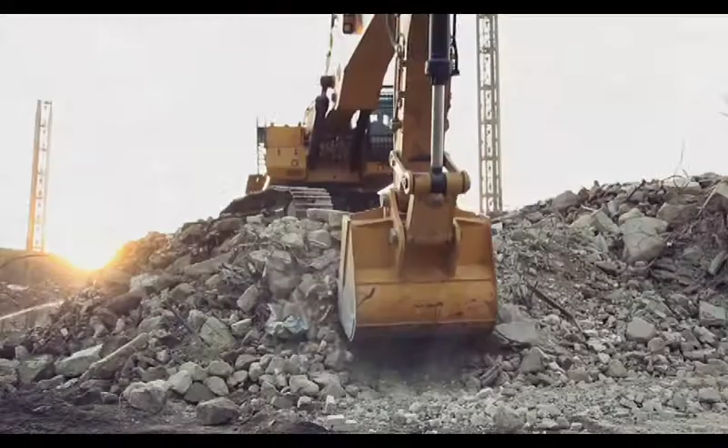The story of Alcar is one which has deep roots ingrained in the best of Italy, that which invents and innovates. Alcar is the result of the fusion between CTM, Costruzioni Termomeccaniche Meridionali, with Alcar S.p.A. of Valle in 2005. Two companies who have always associated their name with mechanics and light, medium and heavy mechanical and metalwork fabrication.

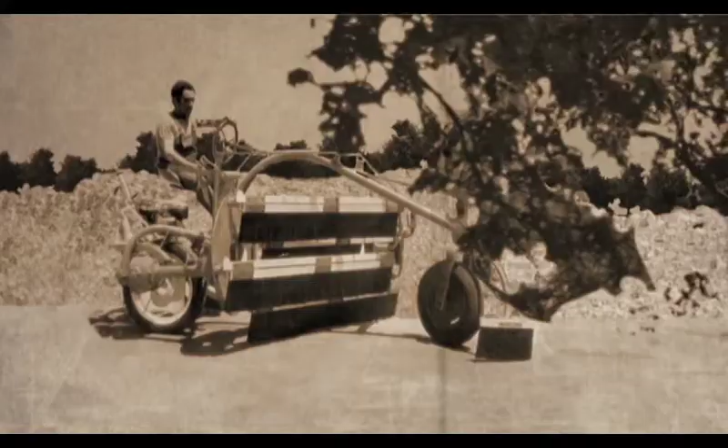CTM has manufactured conveyor belts, cranes and special machines for processing tobacco and the collection of olives in Puglia since 1960, over time becoming one of the main suppliers of Fiat Allis, today's CNH. Alcar S.p.A. belonged to the Bruneri family, a family which eternally linked its name with the world of earth-moving machinery. It was the Bruneri brothers who invented the first fully hydraulic excavator in the world in 1948.

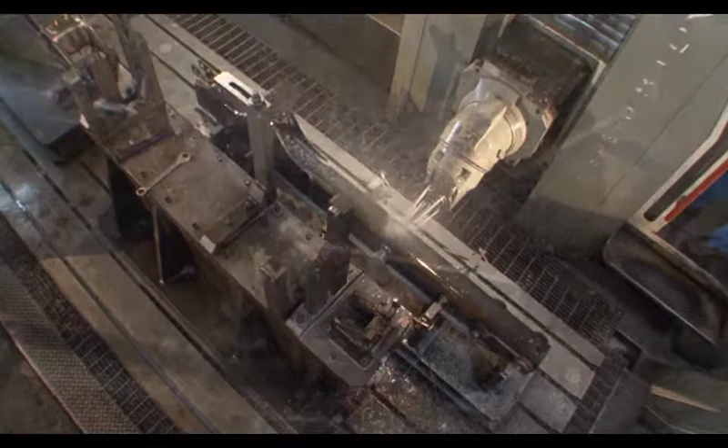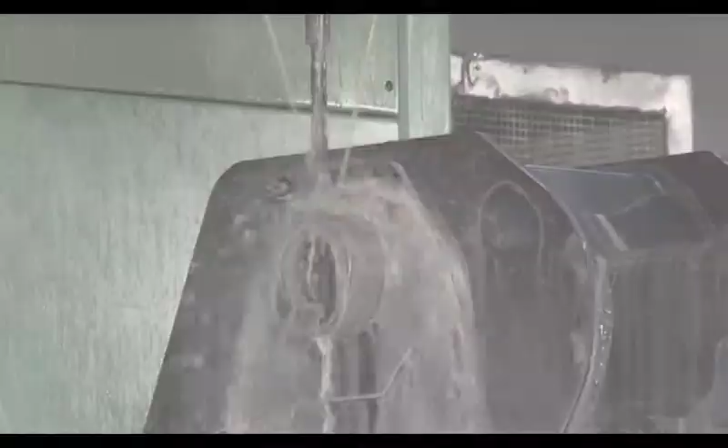Today, Alcar has become one of the European leaders in mechanical and metalwork fabrication for construction site machines. This is the only company in Europe which has a complete internal production cycle. In this manner, any component can be designed and realized independently for our clients. But let us proceed in order.

Today, Alcar has two plants, one in Valle, in the province of Turin, which manufactures the light mechanical and metalwork fabrication, and one in Lecce, which is for medium to heavy mechanical and metalwork fabrication. The internal management of all of the productive processes, together with the ability to design each component and each processing cycle, has created a virtuous circle.

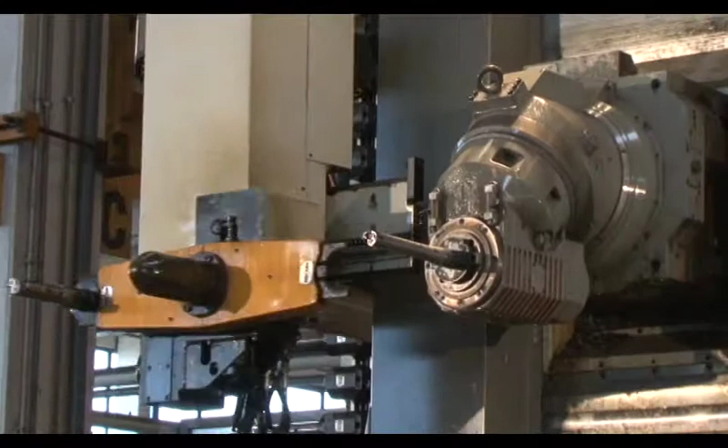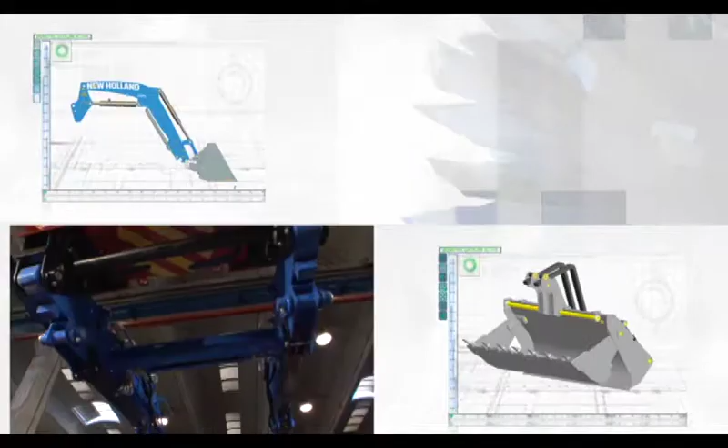On this path of continuous improvement, the increasing expectations of the clients, who are leaders in their own sectors, meet a continued and positive response. Today, Alcar counts CNH, Fiat Group, Caterpillar, Liebherr, Ålö, Turk Tractor and Sampierana amongst its clients.

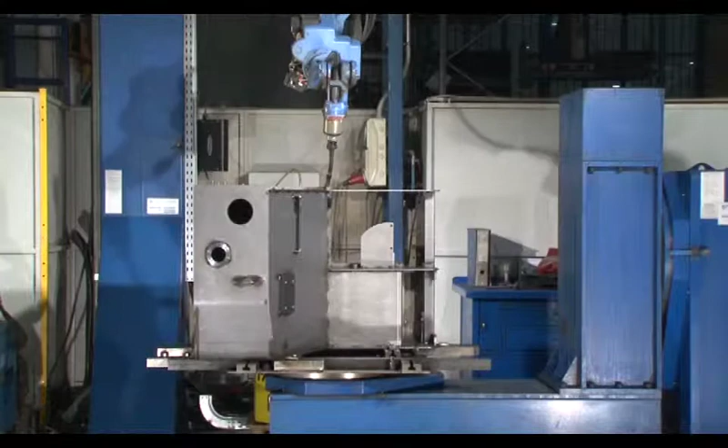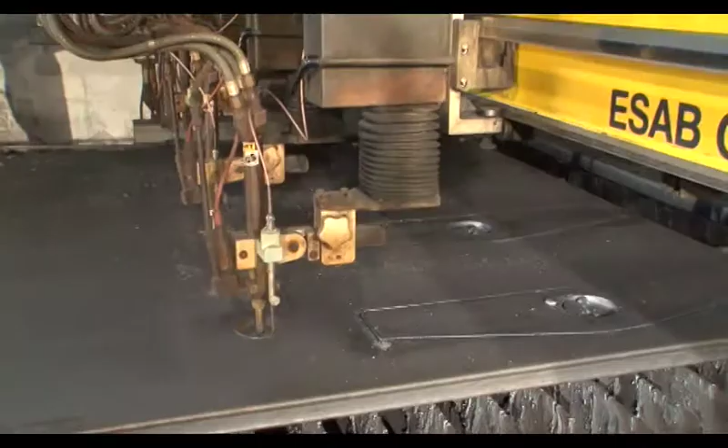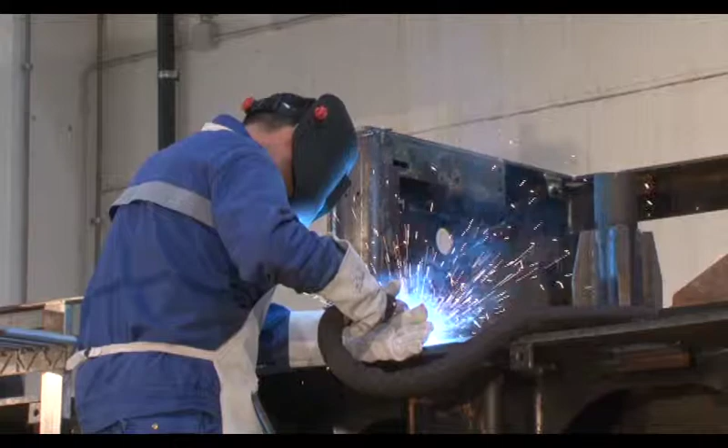In today's markets, which are always challenging and dynamic, Alcar has demonstrated that it knows how to start and above all modulate new productions thanks to a continued interaction between its design department and that of its clients, creating co-design and co-engineering activities. It often occurs during the research and development activity that Alcar not only flanks but substitutes its client, releasing them from burdensome and complex activities.

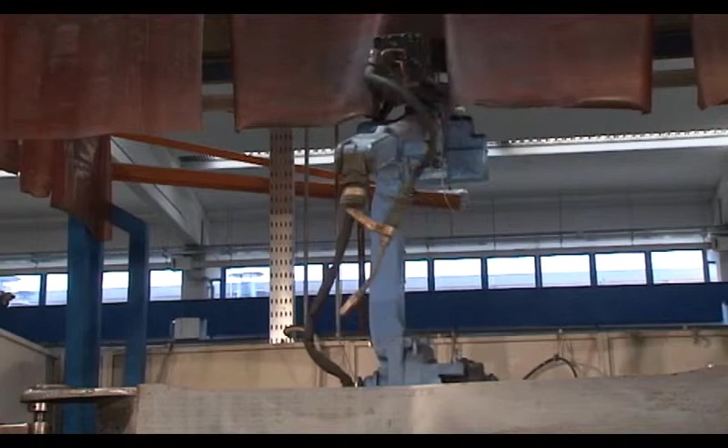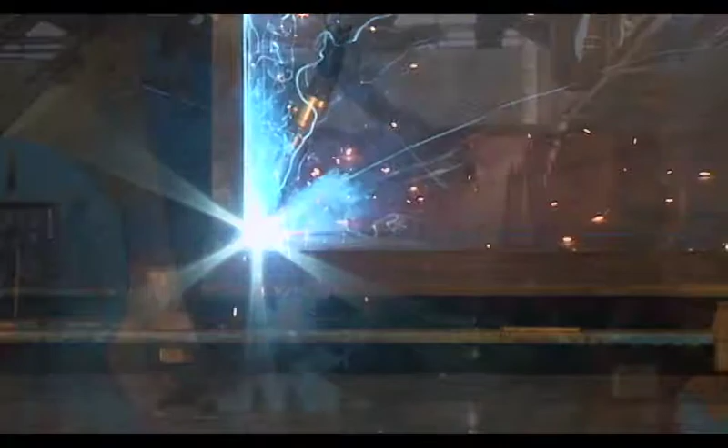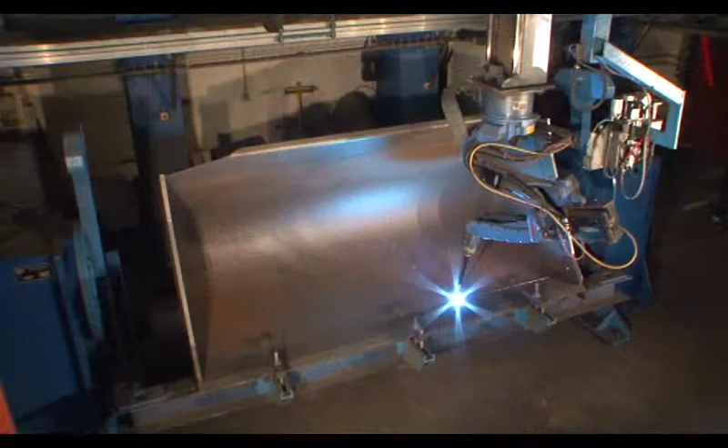The possibility of internally managing each work cycle allows the production times and costs to be positively influenced, simultaneously increasing the level of quality of the finished product. The Six Sigma methodology is constantly applied in Alcar and guarantees excellence in service from the point of view of continued optimization.

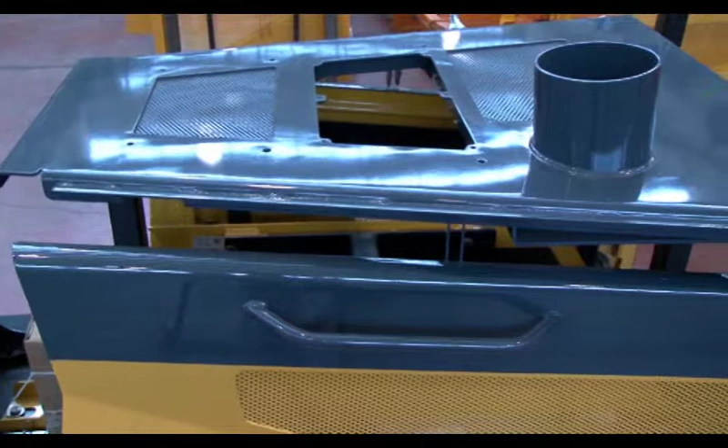The core business of the company is supplying clients with the finished component, painted, ready for assembly on their lines. The level of enrichment and the component service connected to the products which exit the Alcar plants on a daily basis have reached heights which were at one time unthinkable. The technology present in both plants is mutually integrated.

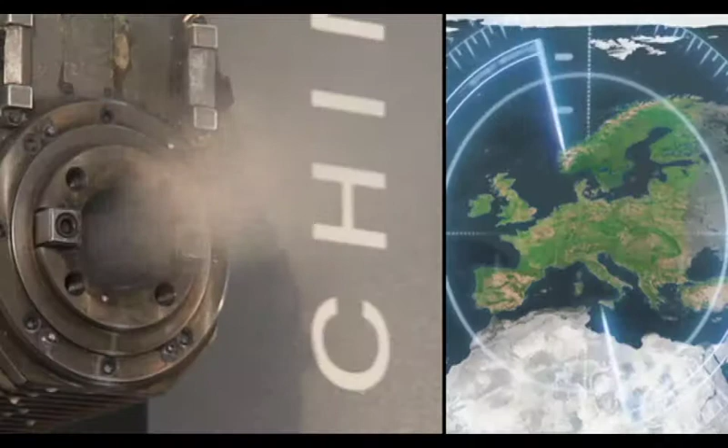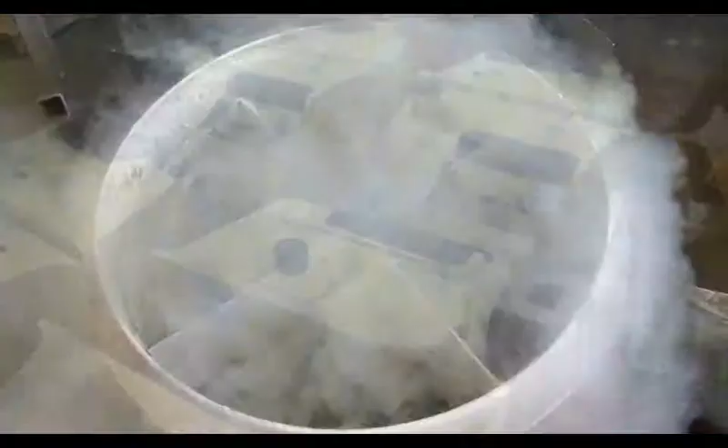Today, Alcar is the only European company able to supply mechanical and metalwork fabrication components which range from the structural to the mechanical and metalwork fabrication bodywork and tanks. Let us look at all of the productive processes in detail. Defined as the production cycle, the process starts with the preparatory phases of the raw material.

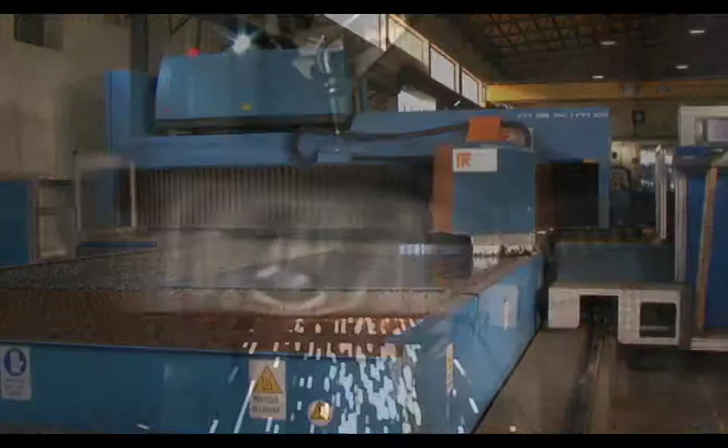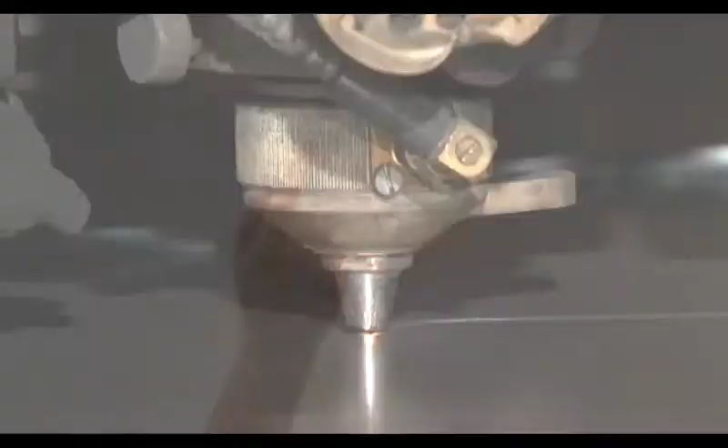This is followed by the cutting of the plates, which, depending on the thickness and the characteristics of the product requested, is carried out using different types of technology: 2D and 3D laser, flame cutting, plasma. This is followed by bending phases, which may be robotized, and the stamping phase carried out with presses which reach 800 tons. The component is welded manually as well as with modern robots.

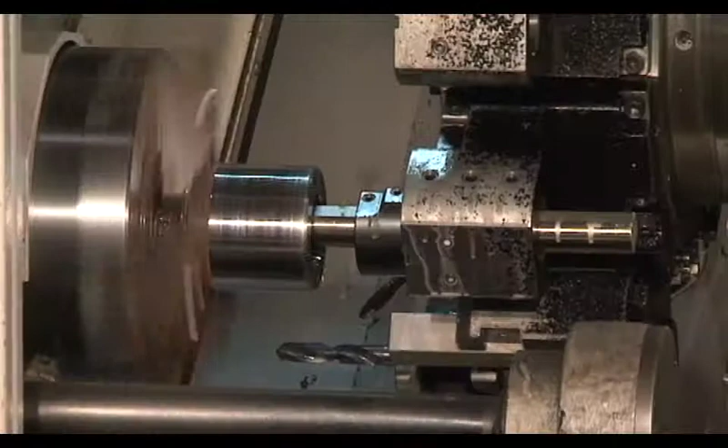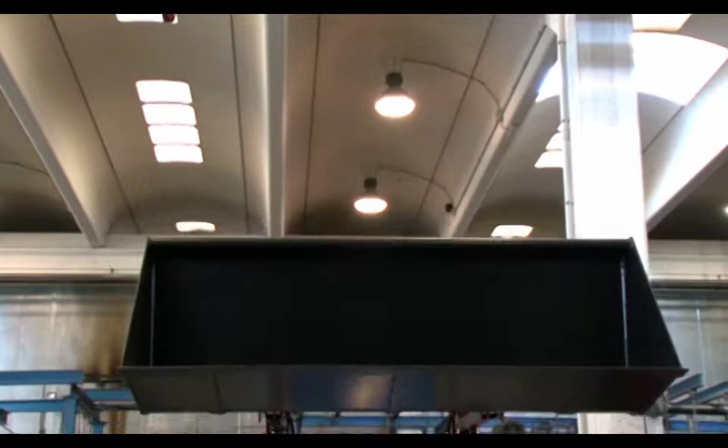The client is supported and assisted during the most delicate part of the design phase, such as the realization and the engineering of new products, or the improvement of existing products, in order to optimize both the service and aesthetic level of the product, as well as its cost. The project passes through the FEM structural analysis, the dynamic multi-body or fluid dynamic systems, to arrive at the 3D modeling which are specified in the realization of the executive table.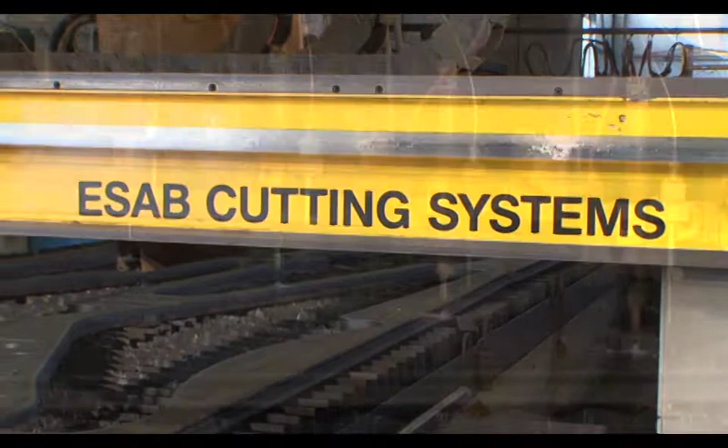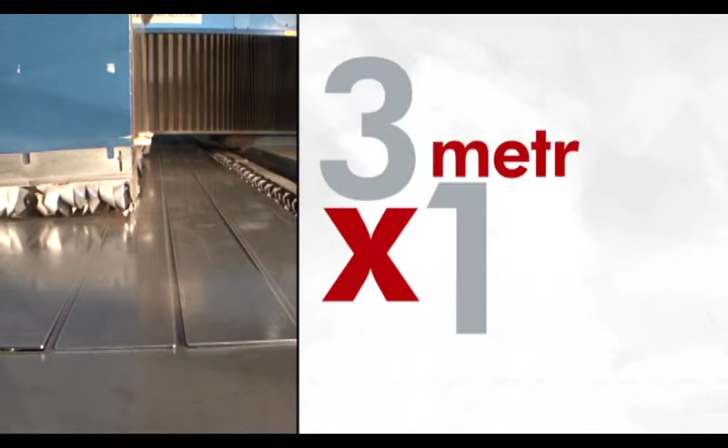Beyond the laser technology, the company also has flame cutting and plasma systems in order to optimize each individual productive request. The laser cutting system is employed for thicknesses up to 25 millimeters, with bench lengths of 3 meters by 1.5 up to 16 meters by 4.

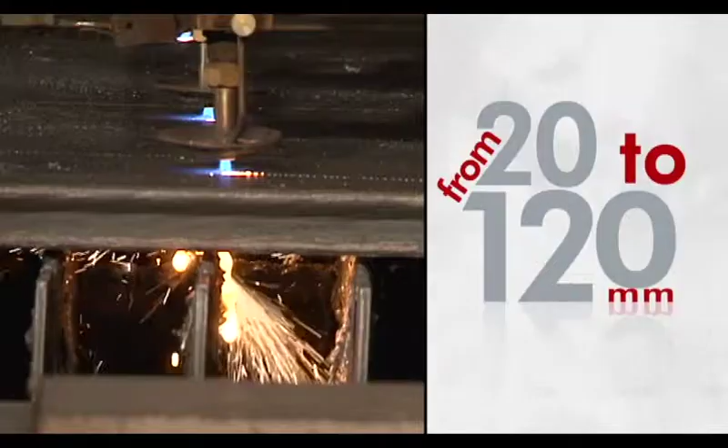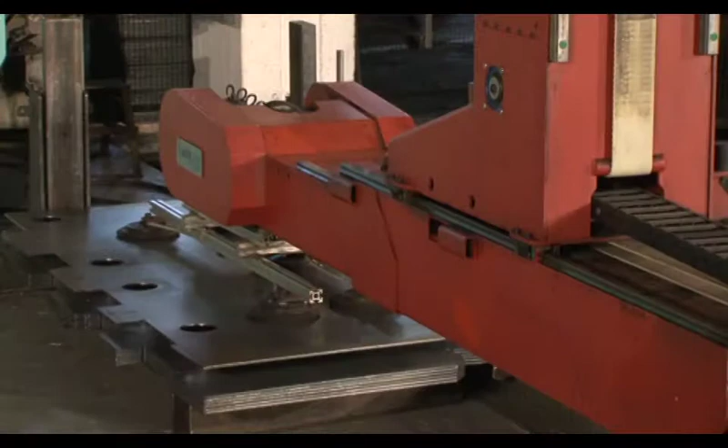The thermal cutting system is employed for thicknesses of 20 to 120 millimeters for a maximum size of 3 meters by 12. The presence of a plasma torch, which works in combination, increases the flexibility of this system. Once cut, the plate is bent following a number of preparatory phases, if foreseen, such as burring, beveling and puncturing.

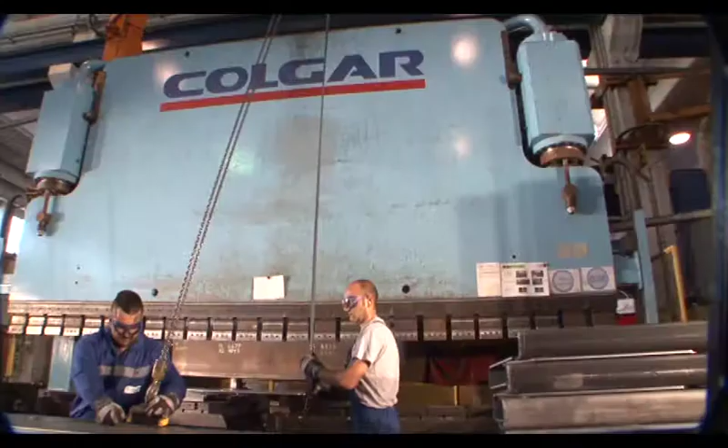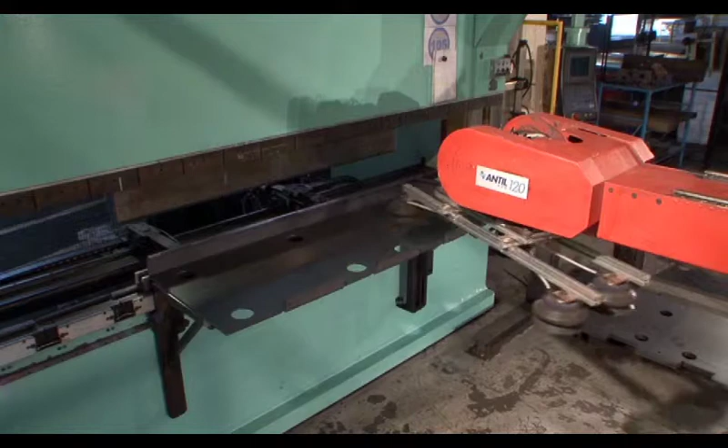Colgar employs presses which reach up to 800 tons with a maximum bending length of up to 6 meters. The use of robotized systems for the automation of the bend, with a capacity of between 120 and 250 kilograms, and the control of the relative angle, significantly increases the efficiency of this process phase.

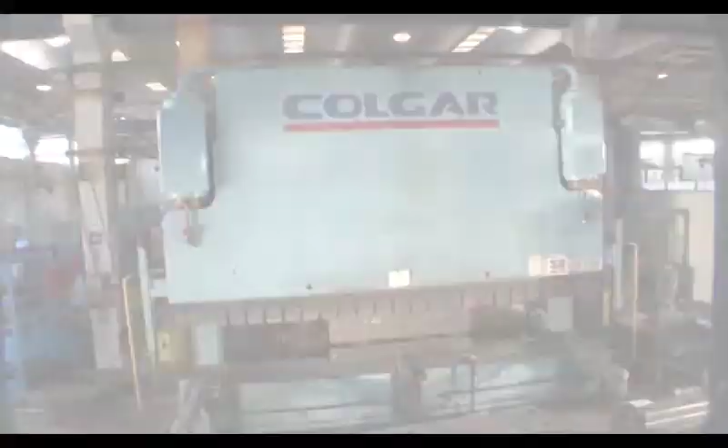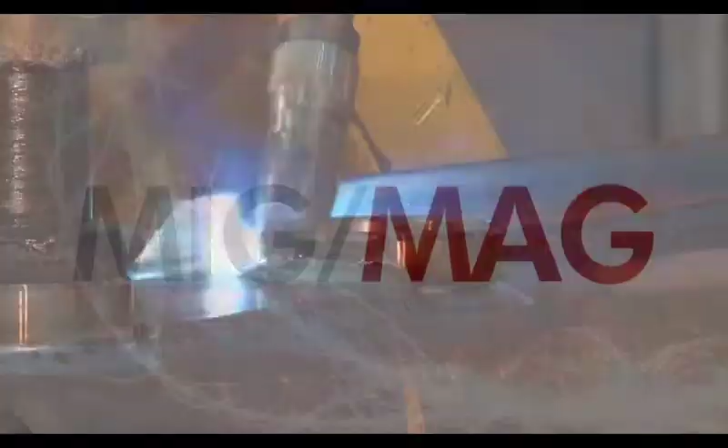The component welding phase starts after the bending. Here, one of the most delicate phases is carried out in the specific departments. The technology used is MIG-MAG arc welding with continuous wire welding. Alcar has approximately 50 robotized systems which allow it to reach elevated levels of productive capacity.

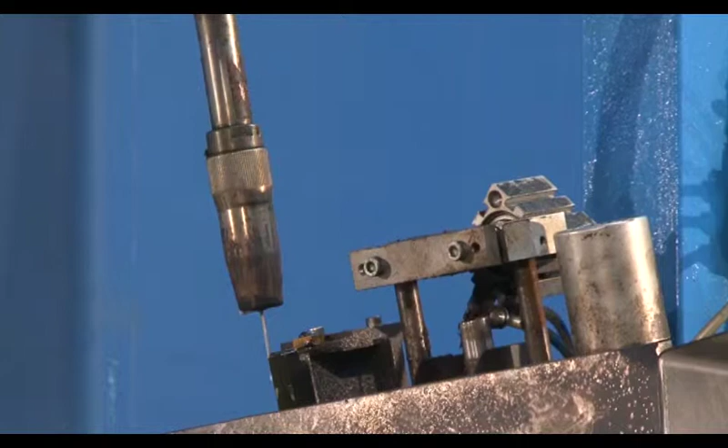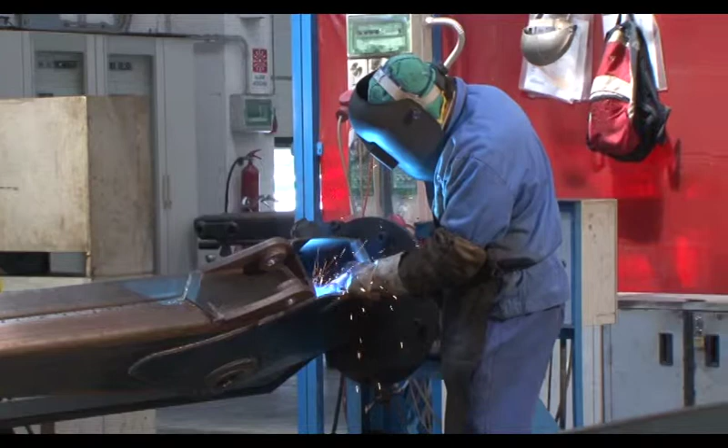Each robotized island has a seam finder and seam tracking system with both a technological laser and electric impulses. The robots are flanked with over 200 manual stations in which specialized welders work, all of whom possess the necessary UNI-EN ISO 287 certification.

The machining process department, concentrated in the plant in Lecce, allows a highly varied range of operations to be carried out. The machine park is composed of CNC turning, boring and milling machine high-speed work centers. The sealing tests and phosphating tests are carried out after the above-mentioned phases, depending on the production of the tanks. Both are carried out through independent immersion systems that guarantee excellent quality results.

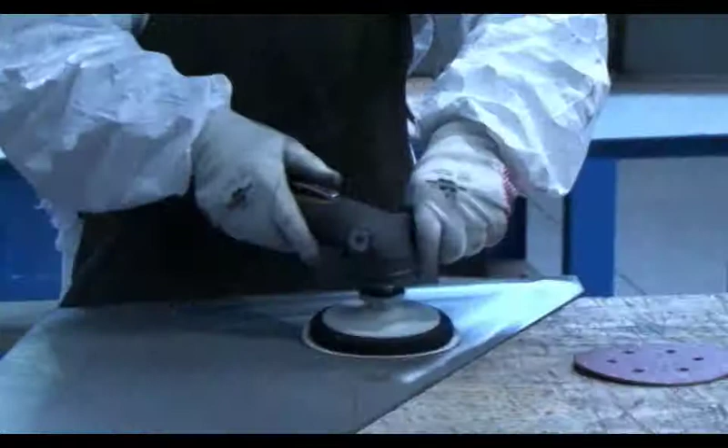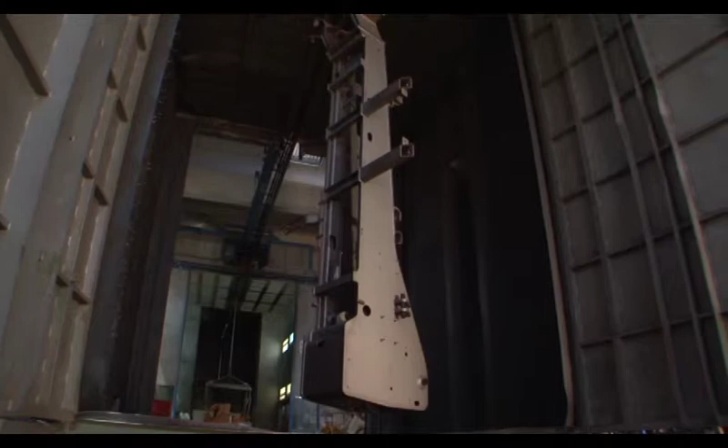Following on from the productive process, the light mechanical and metalwork fabrication components then continue with the cleaning process to guarantee the absence of aesthetic defects on the surface to be painted. When these various processing phases are completed, the light or medium-heavy mechanical and metalwork fabrication is ready to be painted. Alcar has 3 painting plants, of which 2 are in Lecce and 1 in Valle.

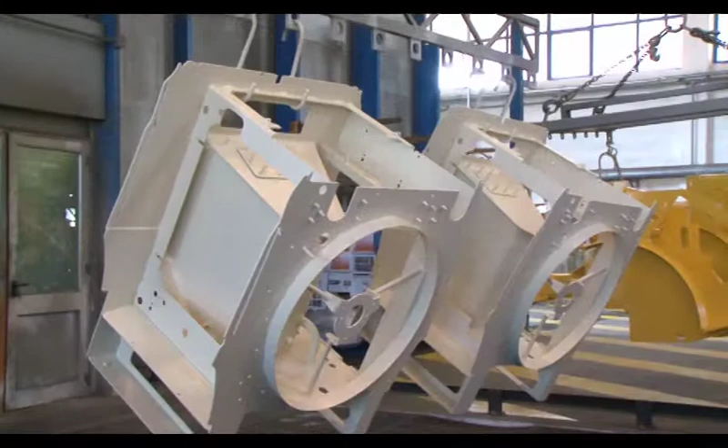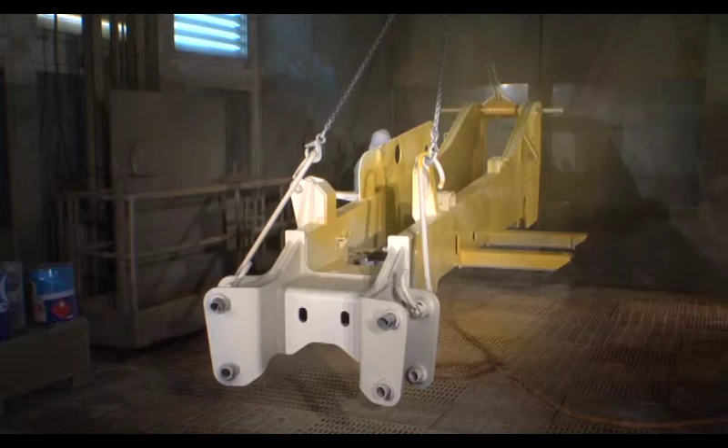In Lecce, the presence of a large liquid painting system, which is able to handle pieces up to 6 tons in weight, allows an elevated standard to be produced in respect to the environment. This objective is reached by employing technology which is able to use water-based paint.

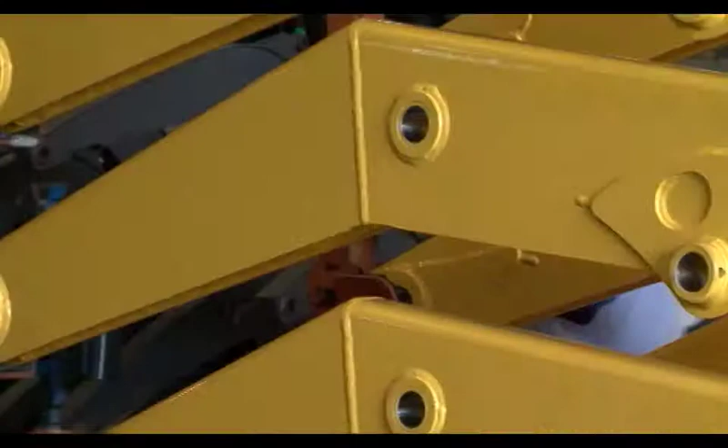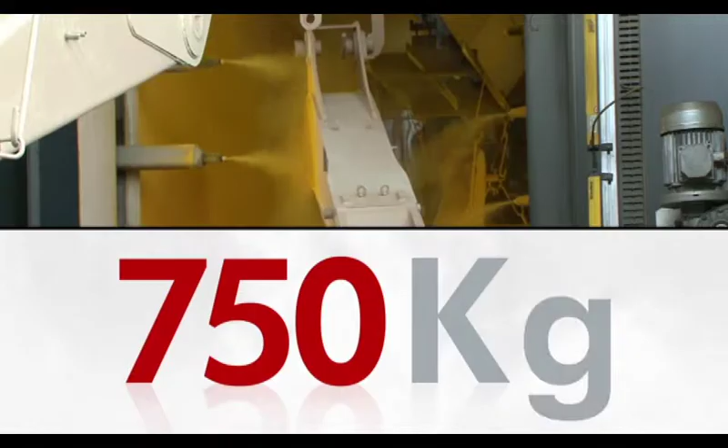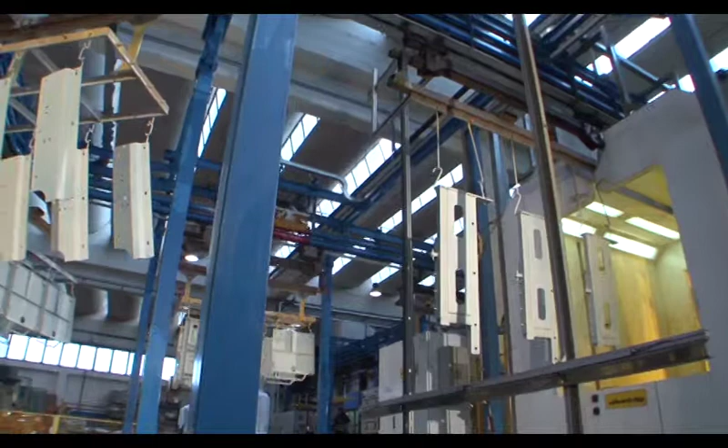In Valle, given the different types of products built, a sophisticated system with an overhead box conveyor, automatic loading and unloading cell, pre-treatment tunnel through phosphor degreasing, primer application cabin, 3 powder cabins, of which 2 are automated, and the relative drying and flash-off ovens has been installed.

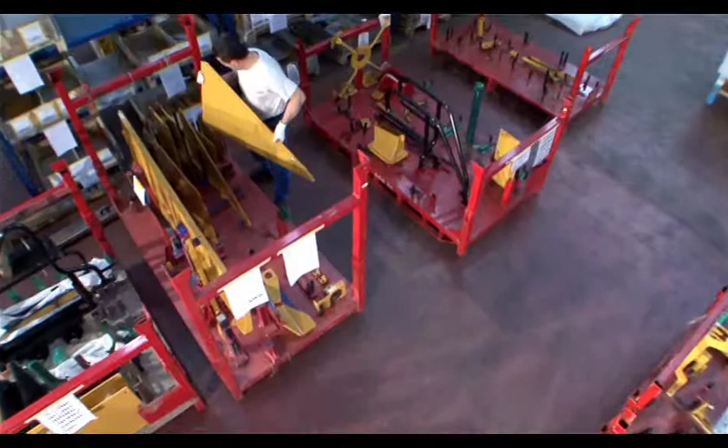Once the painting phase is completed, and only after the conformity controls have been passed, the component is enriched and packed. Alcar has areas which are customized and reserved for each client. In this manner, it is able to guarantee a quality standard of excellence.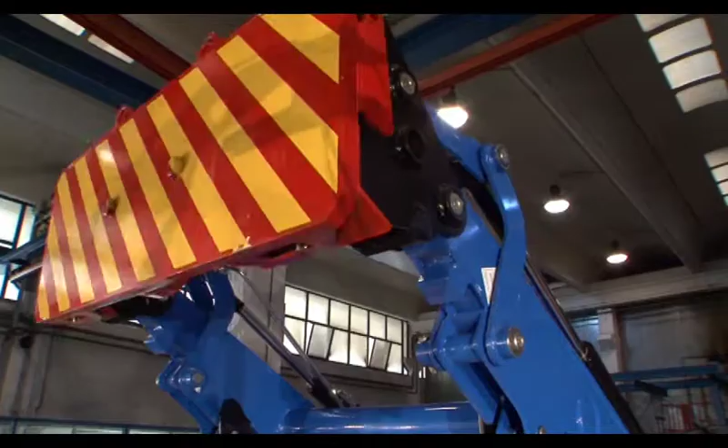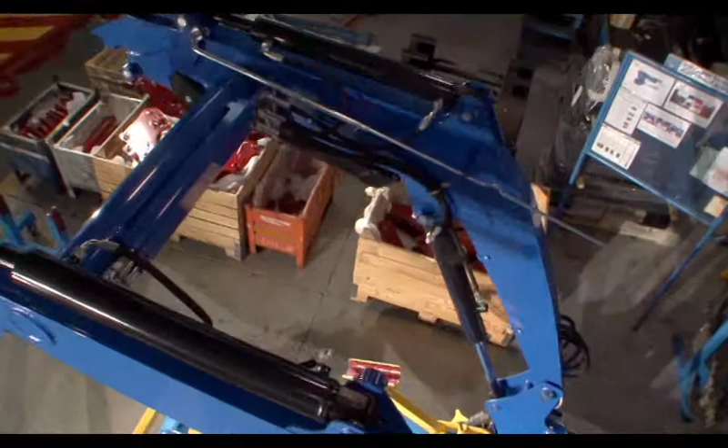Specific tests employing hydraulic components are carried out on products to simulate the same conditions as their final use before shipping, reproducing the strain and the stress to which the component will be subjected during the normal life cycle. This is the manner in which the operating quality of the product is guaranteed.

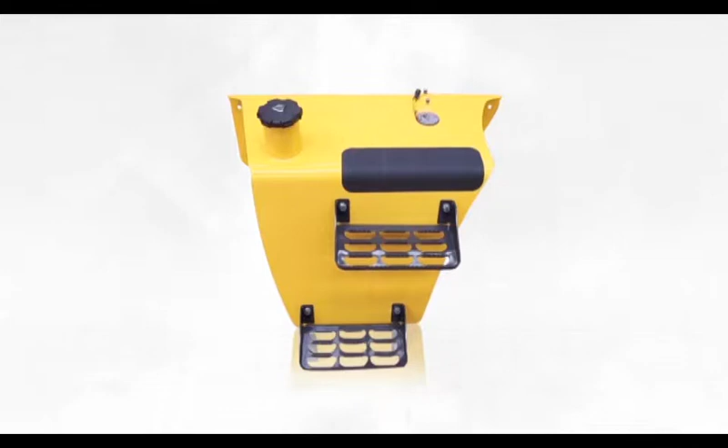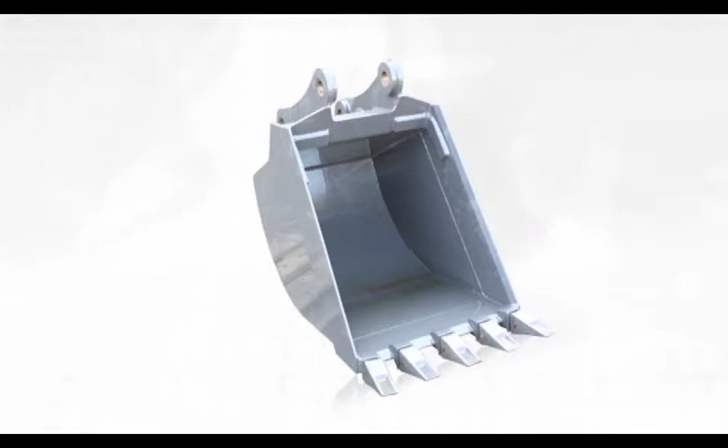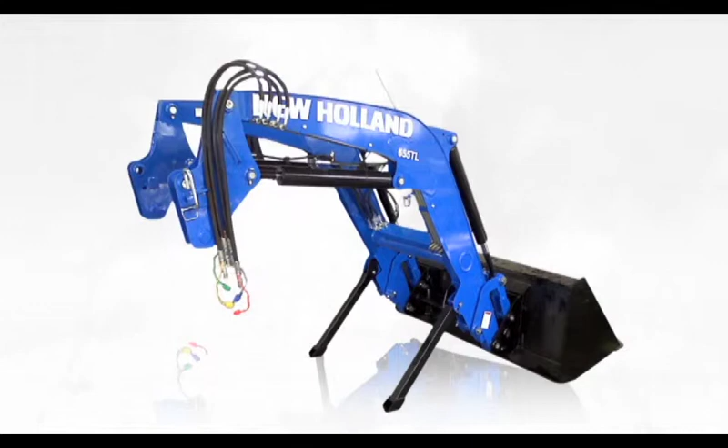Alcar works in a number of different sectors: earth-moving machines, agricultural machines, lifting systems. The range of products is also complete and includes light structural work to medium-heavy structural. In the medium-heavy sector, Alcar currently produces the loading arm, the digging arm, the frame and the bucket of the backhoe loader, the telescopic arm of the telehandler, the pushing arm of the bulldozers, the frame of the paver, the loading arm of the agricultural tractor, the frame of the mini excavators.

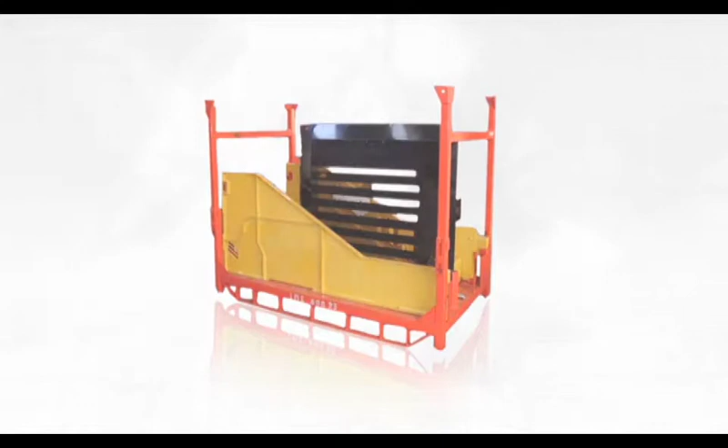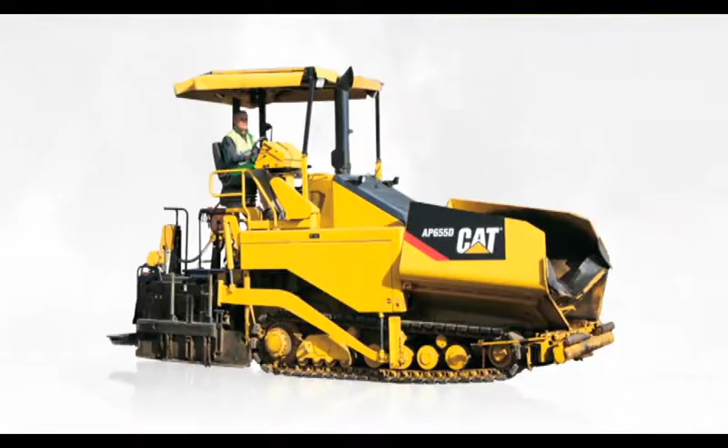The main light mechanical and metalwork fabrication products are represented by bodywork kits and by tank, oil and gas oil kits for machines such as backhoe loaders, large wheeled and crawler excavators, wheel and crawler loaders, and pavers. Alcar. How to get from a simple idea to a finished component without having to think about it.